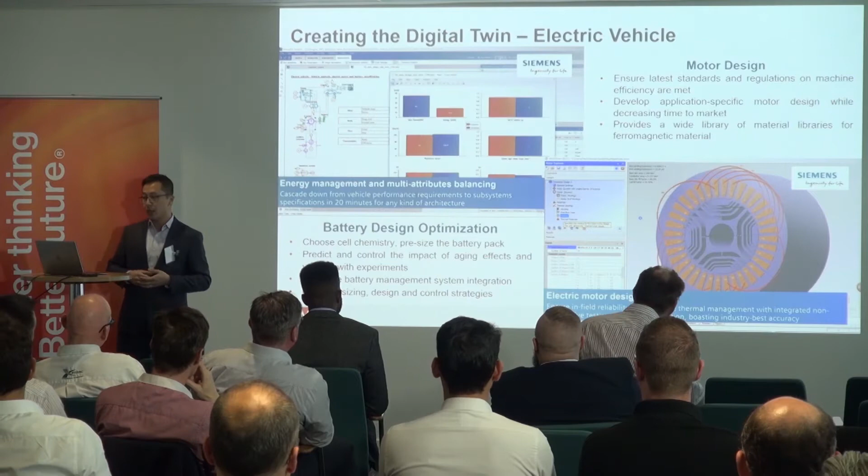So we have what we call system simulation. We instead work with a network of simplified but validated physical components. Those components can include classical hydraulics, mechanical, thermal, electrical libraries, but also industry verticals, like lithium-ion battery libraries. So what that means is that even with limited, unpublished data, you can quickly run simulations and compare performance of various designs using those built-in libraries or manufacturers' data sheets.

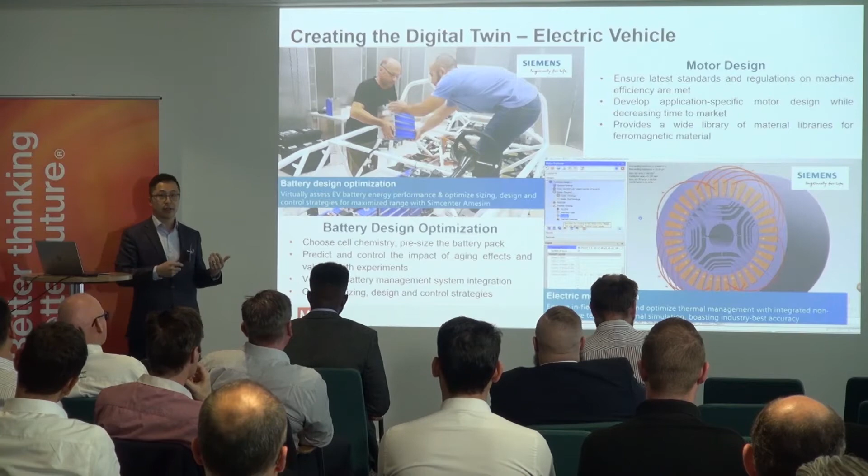So imagine running over 55 different battery configurations, each over 24-hour mission cycles, and then being able to track battery metrics like the state of charge, like the material degradation, and run all of this in less than 20 minutes. Right? So that's really one of the value adds of being able to do system simulation.

Now, in the same vein, designing an electrical machine without a clear definition of the operating conditions can be a challenge. Right now, 90% of EVs use what we call permanent magnet electric machines. Those are superb machines, but one of the challenges is that if the operating conditions go beyond a specific temperature or a specific operating point or rated current, that's called the knee point of the magnet, you can get what we call demagnetization. That is essentially a permanent loss in efficiency for that magnet, and that's a big no-no for an EV.

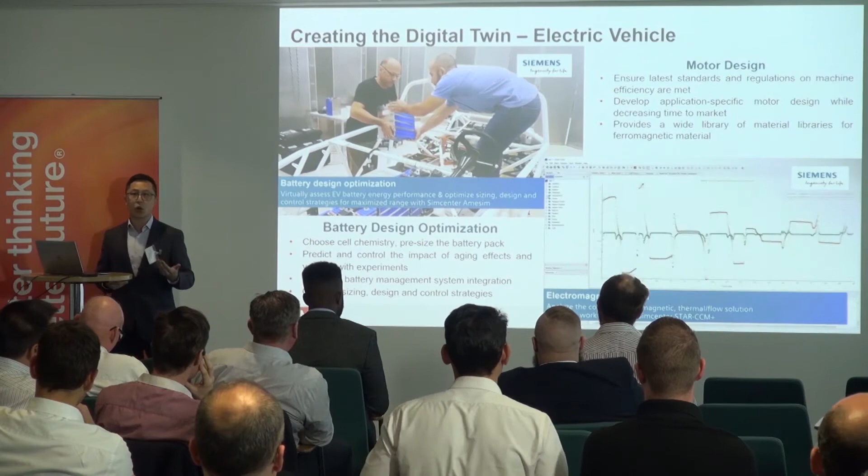So to make sure we get it right, we either have to build the motor and test it, or use simulation. And simulating it with the right tool will allow you to evaluate multiple designs, test different windings, coils, material configurations, to make sure you get it right the first time around. But even when doing so, you're only designing a motor for a specific operating point. In reality, the motor is part of a system.

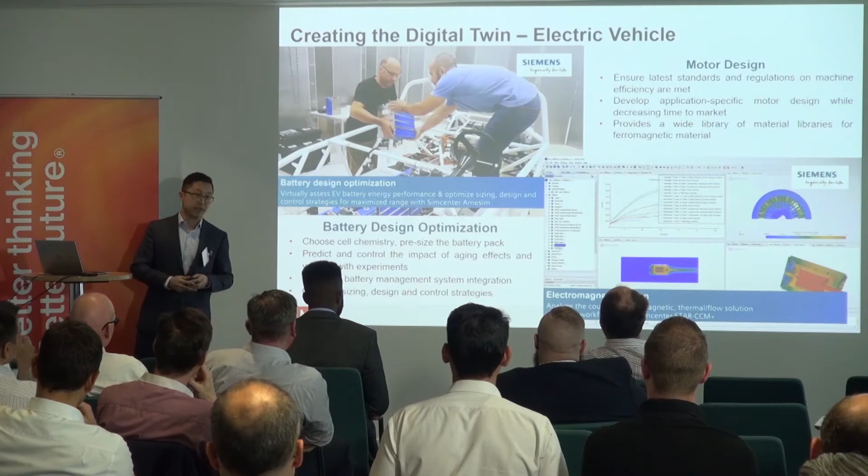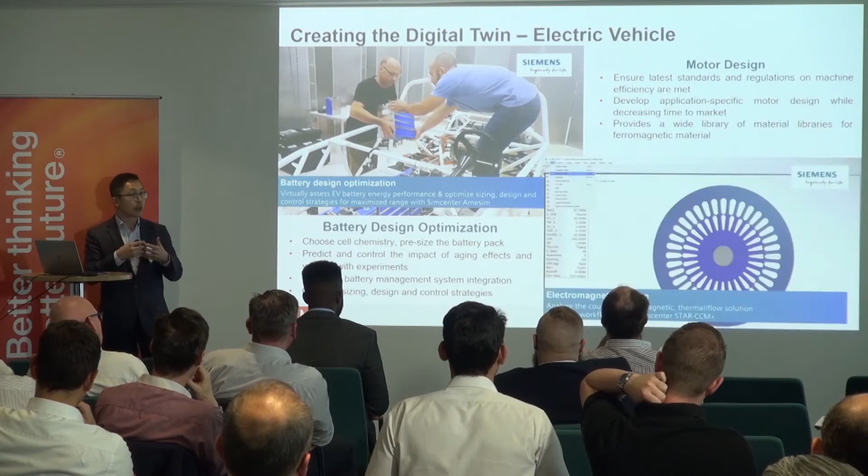And that system dictates those operating conditions and may lead to transient effects, which in turn lead to degradation or demagnetization of the motor. So our simulation tools allow the coupling of both electromagnetic tools and system simulation tools to be able to capture those transient effects and capture those nonlinearities.

Okay. And this is a classic example where we're trying to determine the optimal motor topology to maximize the performance at different loading points while minimizing what we call the cogging torque, essentially the torque it takes to move the shaft by hand at zero current. The traditional approach would be to change the parameters manually using a typical design of experiments. I'm sure all of you have heard of this before. But it's time consuming, and then you have to visually inspect and pick the design. So sometimes even with simulation, these kinds of workflows can still be difficult.

And like Joe mentioned, what we can accomplish with a tool is a fully automated design exploration that's easy to use by non-experts, that's fast, and that connects to over 50 different engineering tools, Siemens or non-Siemens alike.

So in this case, where you're using our motor simulation tool with system simulation, we're also connecting it to Excel and some CAD tools to generate that CAD. And all of this is possible using what we call the Sherpa technology, which was acquired by Siemens not too long ago, and is a technology that was developed by, or in partnership with, the same professor that invented the genetic algorithm, Professor Deb from Michigan State University.

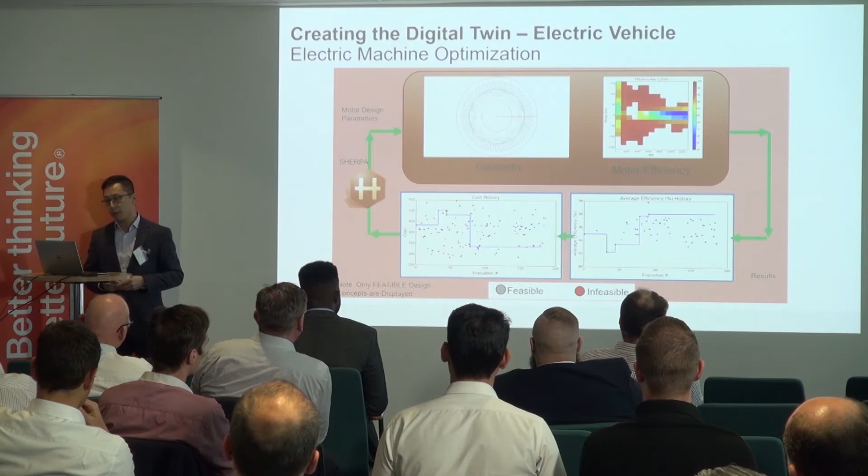Okay. So in this case, we're running over 200 different motor configurations, obtaining the geometry on the fly, the motor efficiency map, average efficiency, and also its cost.

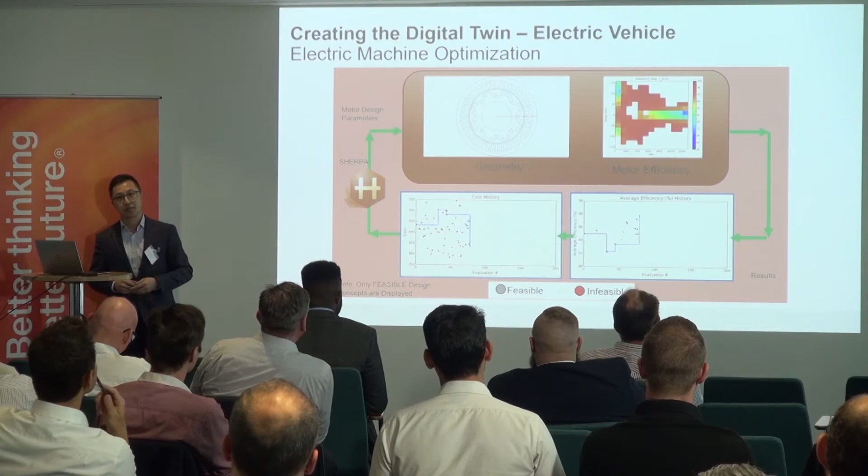Okay. How about product customization and associated challenges? So as we've been mentioning, designs are evolving constantly. Think about the size of cell phones then and look at yours today, right? So those changes not only affect the CAD designer, but also the CAE analyst that needs to make sure that the product you're developing is structurally sound. It's like always a conflict between, let's say, building engineers and architects, for instance.

And one of the recurring questions when it comes to using simulation to validate the behavior is: is my model an accurate representation of the physical reality? Because assumptions are made when using simulation. How can we validate those assumptions? And maybe another question is, what if we don't validate those assumptions, right?

Not sure if you guys have heard about that bridge in Washington. It's the Tacoma Bridge, very traditional, which was designed without validating its behavior for aeroelastic flutter analysis. So that's, of course, a worst case. By the way, that bridge was built and then fell after 4 months. Just to close the story here.

So for designs like a car frame, if we go back to our EV industry, getting the answer to this is typically accomplished using experiments. We put accelerometers on the structure and compare the modal content, or the modal assurance criterion, MAC value. And then we realize that the experiments don't exactly match our simulation model. So we go back to the test bench, add more accelerometers to increase the quality of the data, modify our simulation model, etc. So this is really an iterative process, and there's a lot of time involved.

It's difficult. So with our solution, what we can do is automatically correlate, update, and align our model with the test data, making sure that it is accurate the first time around.

On the other hand, from an experimental perspective, another challenge is where should I put my accelerometers on the structure, or where should I excite the structure to maximize the quantity and the quality of that data from experiments. In an ideal world, we'd put an infinite number of accelerometers on the structure, but the reality is those accelerometers take time to install, they're expensive, and there's also a test equipment limitation. So how can we shorten this process and reduce the time spent on capturing that data, right?

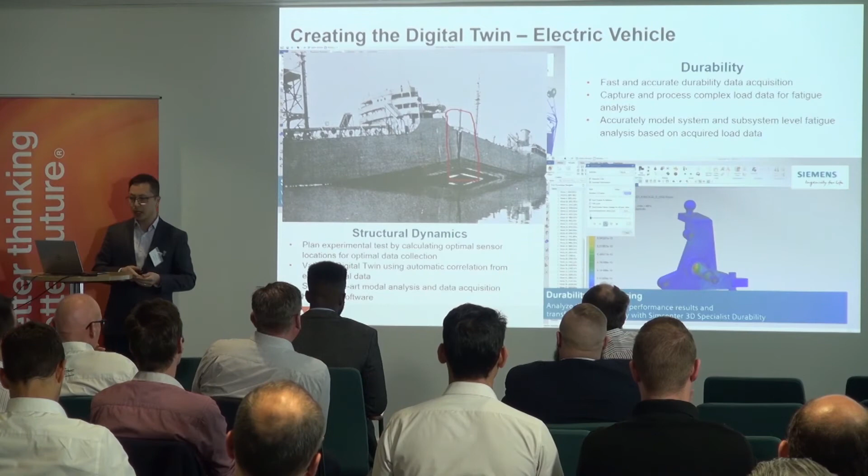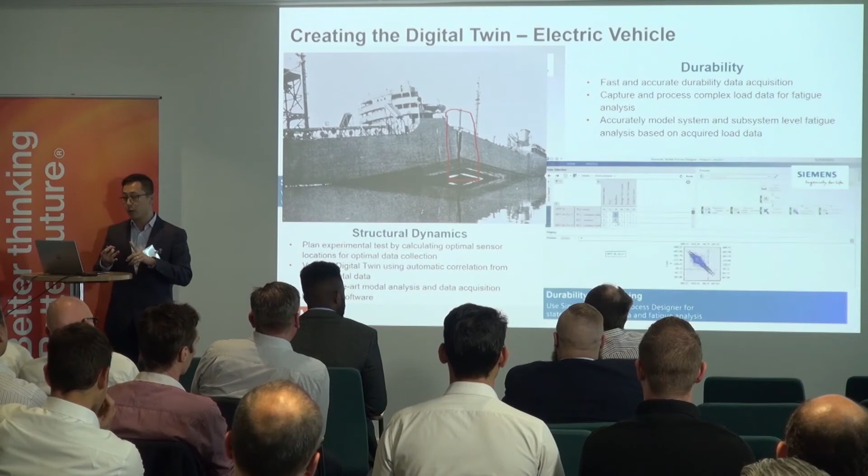Now back to our original question: is the new product that we've designed structurally sound? And how long will it last? How can we quantify this? We can do this using the science behind durability. Our durability solution is aimed at answering questions like, will my product crack? Where will it crack? Will the welds last, and for how long?

So where are the critical areas that I need to reinforce to avoid massive failures, like the one that happened with the Liberty ship during World War II, where you had straight welds throughout the deck. Or like the Boeing 737 on its way to Hawaii, where the engineers did not take into account the cycling of pressurization and depressurization, which led to a durability failure and the explosion of the cabin.

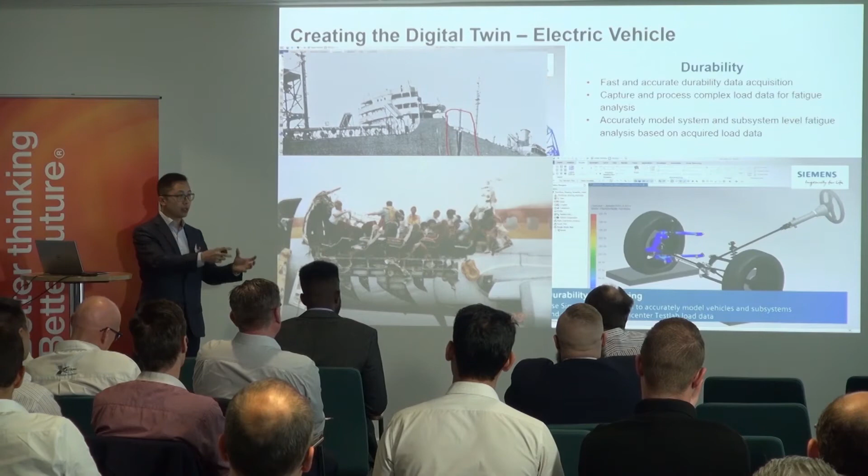So admittedly, there are many ingredients to a good durability analysis, but a crucial part is to get real-life operating conditions. And again, at Siemens, in the spirit of having a holistic workflow, we have a dedicated data acquisition platform that permits this natural exchange between data collection and simulation. So there's a direct pipeline between the two to accurately predict failure.

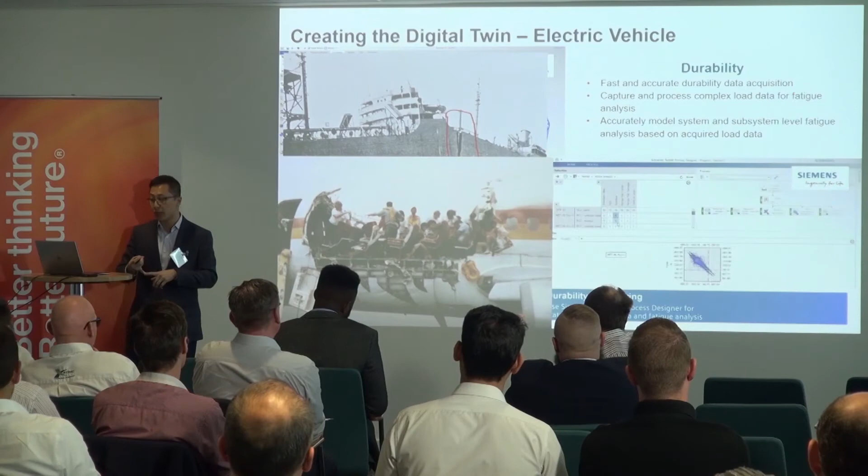And what can you accomplish with this data in hand? Well, just for a few examples, you can predict maintenance schedules, tailor product warranties, lightweight your parts, but also meet the new and fashionable regulations.

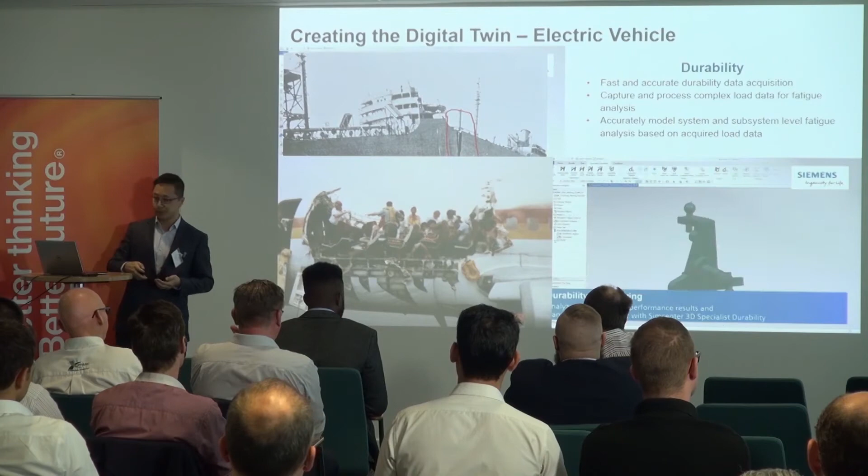And speaking of which, regulations, right? This comes as no surprise. The more complex design becomes, the more technologies are involved in each product, and therefore the higher the odds of failure, if one might say so. And the holy grail being the 5-9 rule, reliability, 99.999%.

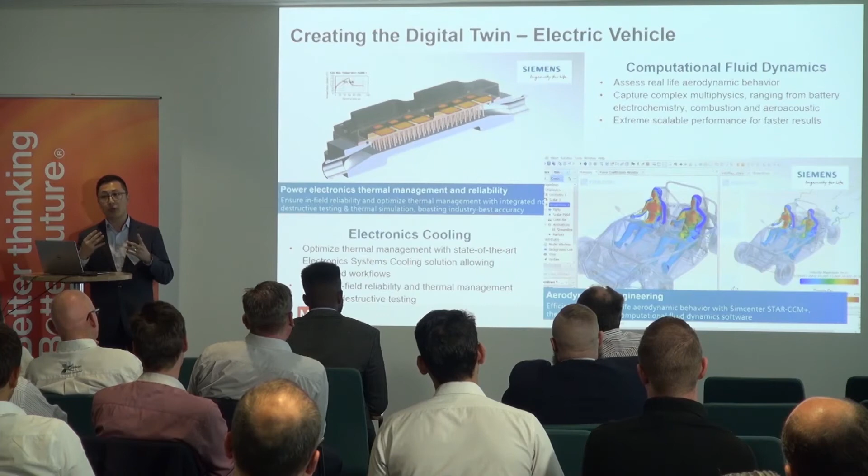And this is particularly true for electronics. It is the foundation of so many things: controls, automation, performance, safety, and we've seen some of that recently in aerospace. Their performance and reliability is affected by multiple environmental factors, and probably one of the most important is their operating temperatures. High temperatures decrease product life, decrease efficiency, increase system failures.

However, if the product is too cold, well, I bet someone somewhere will ask you, why are you not pushing it to its limit? Why are you not increasing the power density in it, if there's such a margin on it? And these conflicting problems always drive a continuous push for better and better thermal management systems. And again, we can do it experimentally, or we can do it using simulation tools, like we saw just up there.

Another challenge in electronics design and simulation is the sometimes disconnected world between ECAD and MCAD engineers. Each of them works with different tools, different models. ECAD will look at things like layouts and schematics using tools like Mentor Xpedition, which is, as Joe and Stephen mentioned, now part of the Siemens ecosystem, while MCAD engineers will run structural analysis for fatigue, look at CFD, thermal, and so on.

And a solution that a CFD engineer comes up with, like moving the position of a component, might make no sense from an electrical standpoint. So to avoid these dead-end situations, it is important to have seamless collaboration between those two groups and make sure that they understand the need to communicate realistic changes, like keep-in and keep-out regions, vias, etc. And this is possible using the digital solution.

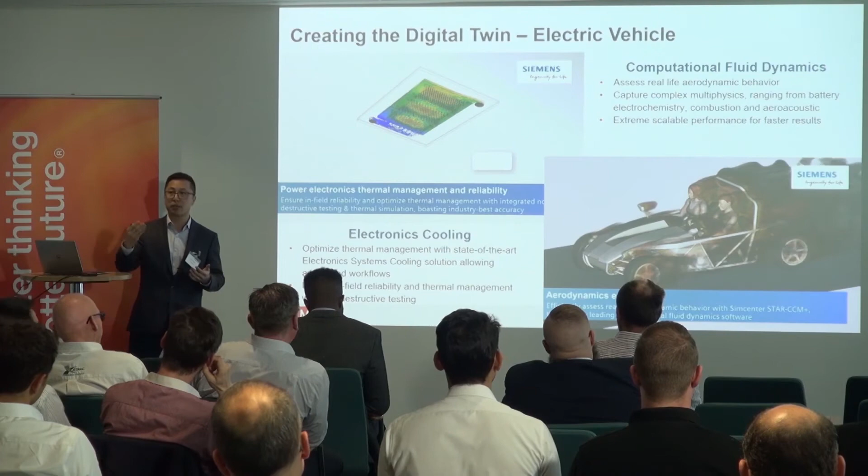So computational fluid dynamics, right? One of the traditional views of CFD is to do aerodynamics. But apart from designing fast F1 cars for the Red Bull, the Williams, the Ferrari of this world, by reducing drag, what else can you do with CFD?

And just going back to our electronic example up there, thermal analysis can be accomplished using CFD. So to calculate forced convection, natural convection, calculate radiation, validate heat sinks, design new cooling systems using multi-phase flow, and so on. From a macro level as well, being able to accurately capture CFD is also useful.

It can be used, for instance, to significantly save on fuel consumption by meeting new green standards and regulations, and also ensure maximum human comfort. So in the building industry, for instance, standards like ASHRAE 55 are designed to put a limit on the allowable felt temperature for humans, and also quantify or qualify the quality of the air that they breathe. And that's also applicable in the transportation industry for cars, airplanes, trains, etc. So these standards are gradually incorporating CFD as part of the certification process.

And the reason why gradually, I'd say, is that a typical challenge is that a lot of people, when they hear CFD, think it's complicated, right? They think about the mesh. How do I tailor my mesh size? How do I choose the right turbulence model? But CFD is evolving fast, and it's changed a lot over the years.

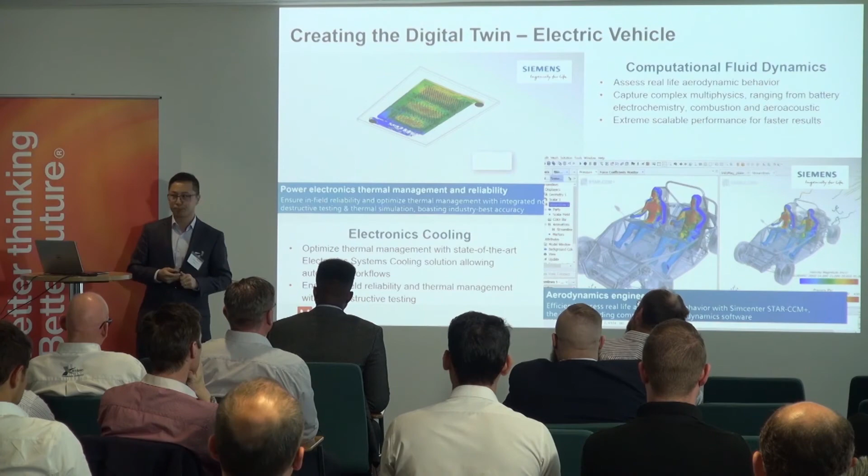And speaking of comfort, of acoustic comfort, let me just try not to break everybody's eardrums, but let me try to play this here for a moment.

Anyone know what car this is? That's a Daytona Charger, very popular in the United States especially. Let me play another one here.

Well, the point of it is you can typically hear pretty much nothing, right? Because the sound was from a Tesla 3, an electrical vehicle. That's the point. It's quite comfortable, right? So just show of hands here, who preferred the Daytona noise if they were driving? Okay, let's say a third of the room. How about who better likes the Tesla sound, the electrical vehicle sound? Very quiet and steady, the low range. Okay, well there's two crowds here, definitely.

So the idea here I want to highlight is how can you design in order to be in that acoustic sweet spot for your target audience. Some people like the muscle cars, other people, like me, like something that's really quiet. So to do so, we need to be able to understand what contributes to the sound pressure levels and how it propagates throughout the systems.

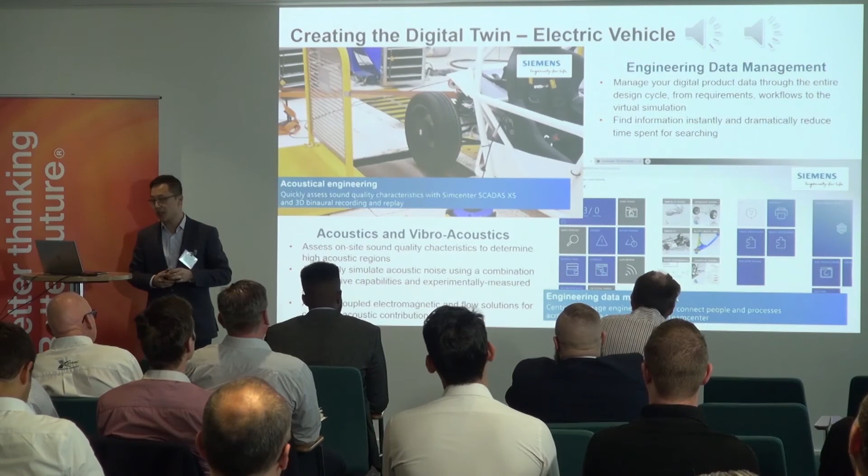And again, just to close the loop, we also provide data acquisition equipment to visually validate and assess sound quality characteristics and their location. We have a piece of equipment called a sound camera, which is literally point and shoot, and gives you a picture of the sound and their pressure level spectra. Naturally, both the experiments and the simulation tools are designed to work together and allow seamless communication of the data from platform to platform.

So why data management? So far we've seen throughout the presentation that products increasingly involve multiple engineering disciplines, and therefore require communication of more and more connected data. With digital industry, or Industry 4.0, companies rely increasingly on simulation, which generates a new type of data—simulation data. So the question is, how can you get control over your CAE data to address the ever-shifting regulations, standards, moving objectives, and keep track of all the different product variants?

Our engineering data management platform is designed to do just this. It's designed to give you power over data and give you benefit across all levels.

From a user standpoint, a study showed that in most companies, about 30% of the analyst's time is spent on looking for data—just, where's my model? Where's that version? I have a set of results, which design is it related to? How can I pull up that model and run it again and see if I get the same thing?

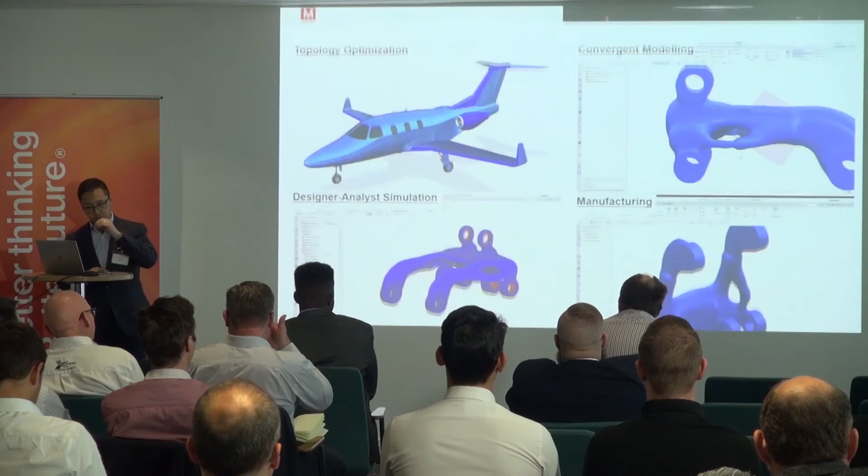And again, in that field, using the Siemens digital solution, designers and engineers can now generate these organic shapes. On the top left here, what you see is what we call topology optimization. With that embedded solution, you can easily generate components that satisfy a variety of functional requirements, from structural stiffness or soundness, minimum weight, keep-in/keep-out regions, assembly constraints, and connection constraints.

So topology optimization can be used in the context of an existing assembly, and you can even apply complex structural loadings, like vibration, to verify the max von Mises stress, or look at the minimum natural frequency, for instance, in the aerospace industry.

Now, on the right hand corner, a typical problem with most tools on the market right now is that the output geometry from a topology optimization is typically what we call a facet geometry. So it's essentially one big face, which means it's very difficult, if not impossible, to make changes to it or send it to other suppliers to modify. So the output is essentially a dead end. But that's not the case for us.

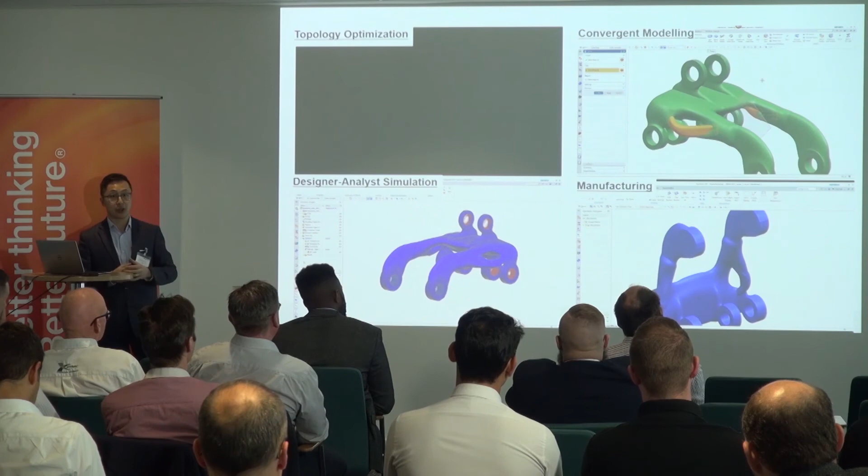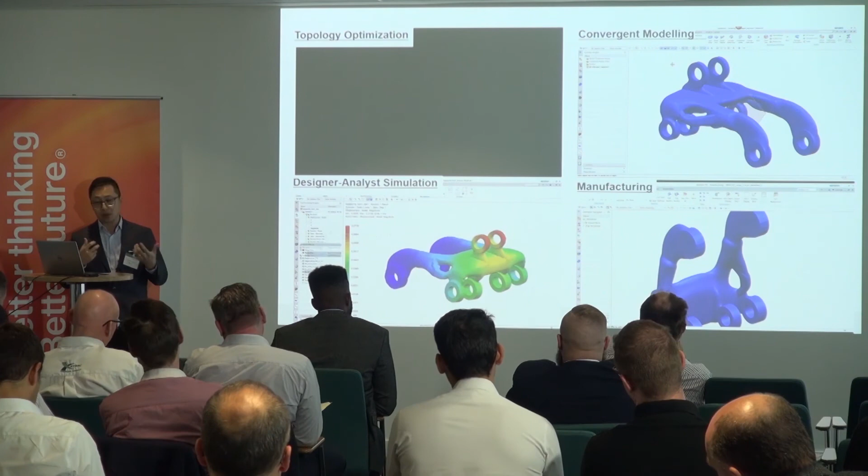What's unique in our platform is our convergent technology, which allows, within a unique CAD environment, without any export or translation, to edit, combine, or modify that geometry on the fly with traditional BREP surfaces. What's also exciting is that because that geometry now lives in that ecosystem, it's possible to bring that very unique geometry into the simulation world and accomplish multiphysics using our whole portfolio solution—structural, CFD, electromagnetic, even co-simulation with system simulations and CFD.

And if you still think modifications need to be done, either on the mesh or in the geometry, you can simply track back the path and go back to the CAD and make those modifications. That's possible using our platform. And again, within the spirit of a holistic solution, the platform also allows you to simulate the machining itself. So the power of the platform not only lies in the process itself, but in its integration in the complete end-to-end workflow within the same environment.

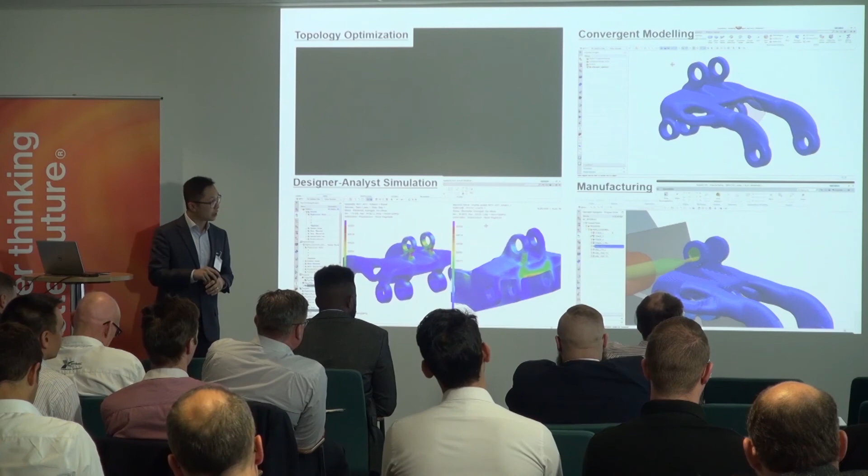Siemens is a believer in its own technology—they're practicing what they preach. This is actually from one of the Siemens facilities in Worcester, about an hour from here, where they're 3D printing metal parts, more specifically Inconel turbine blades for their gas and power division. The technology uses powder bed fusion to create metal parts with properties almost identical to those obtained using typical processes like forging or casting. So this is an example.

So we have the tools to generate the numerical CAD topology, and we also have the printing machines and infrastructure to create those parts themselves. But again, the question here: can we close the loop and simulate the 3D printing process itself for the additive manufacturing world? And the answer is yes. But one of the questions you might ask is, why is this important? Why do we need to simulate the 3D printing process?

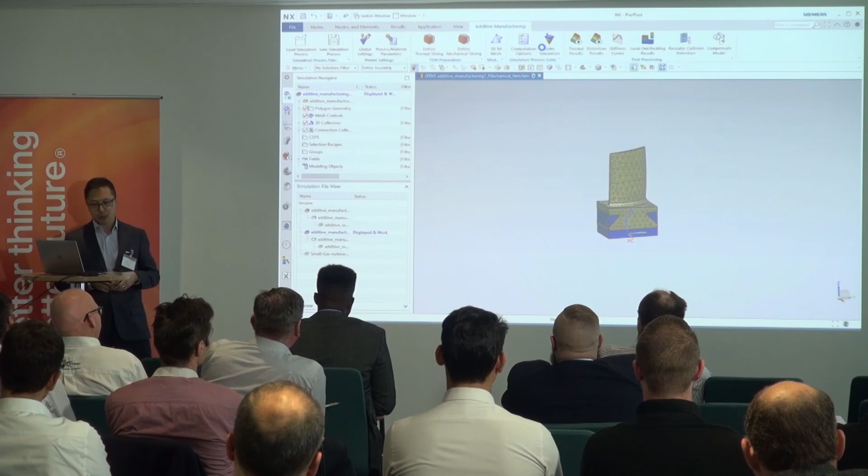During 3D printing, as the layers build up, there are what we call residual heat stresses that accumulate over the printing process. That causes various problems inside the printer, from distortion of mechanical properties—structural issues within the part itself—or simply ending up with a shape too distorted from the part you actually wanted to print because of residual thermoelastic distortions. So getting it right the first time is almost impossible unless you have years of experience, or if you simulate it to make predictive adjustments beforehand.

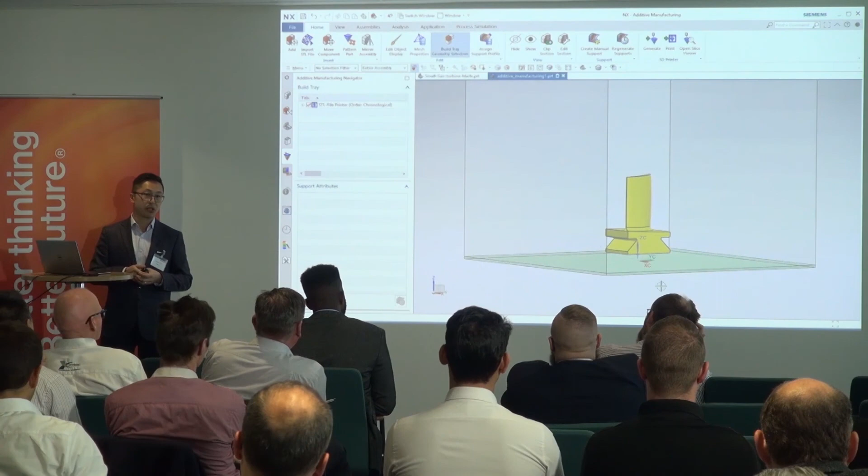Not only will this save you time, but it's also been shown that additive manufacturing simulation can help reduce material waste by up to 65%. In this example, our simulation tool allows you to build everything from the build trays, the support structure, and input the properties for the powder to simulate the powder bed fusion process. And then the holy grail of the simulation is to be able to do model compensation—print a part that's a little distorted from the get-go, or that deviates slightly from the original geometry, so that the final part after residual distortion is exactly what you want. That can be done in an automatic fashion.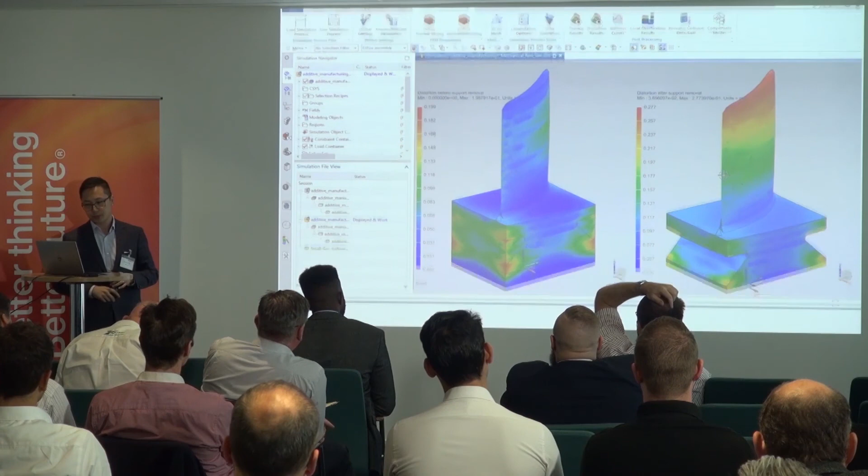Okay, so that was quick. You've seen how each module in the portfolio can give you a competitive edge, whether for better efficiency, faster production, or lower costs. The idea behind all of this is to emphasize that the impact of having a digital twin is exponential when you have a well-thought-out workflow, but also the right tools to accomplish the task. So just a heads up, thank you all for your attention. This afternoon, I'll be having a deep dive technical session where we'll jump into the software, show you what it looks like, and some applications for a few of the tools I've presented today.